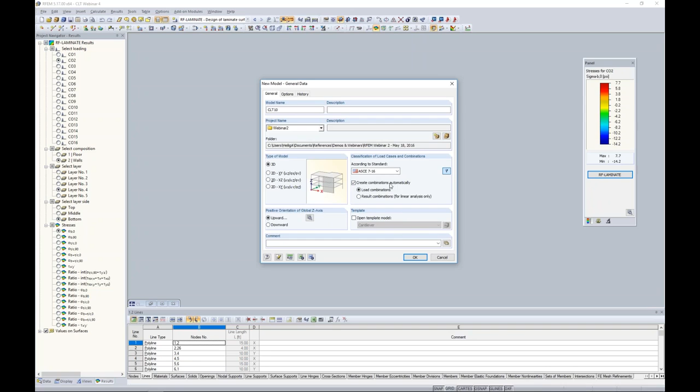With that said, we can immediately jump into our example today. When you first launch RFEM, this is the dialog box you're essentially going to see. We need to give it a name, so we can just call this one CLT10. The load combinations can be generated according to a standard, so you'll notice we have the ASCE 7 2016 here, the NBC 2015, as well as many other international codes. You can always uncheck this option, and that will allow you to manually create your load combinations instead. Once we've defined that, we'll go ahead and use the ASCE 7 2016 for our example today.

The program launches our file. We can see in the center portion here is our main graphical window. This is where we'll begin to generate the structure. Down at the bottom we do have our tables. If you prefer to work with the program this way, you can import and export information to and from Microsoft Excel. We have our tools up here at the top, and we'll certainly be utilizing those today. Over on the left, we have our project navigator. As we begin to generate this model, all of our input data is going to be available within this project navigator. If we scroll down, here is a long list of all of our add-on modules, here's RF-LAMINATE in particular for today. Once we do run an analysis, our results will be available within this project navigator.

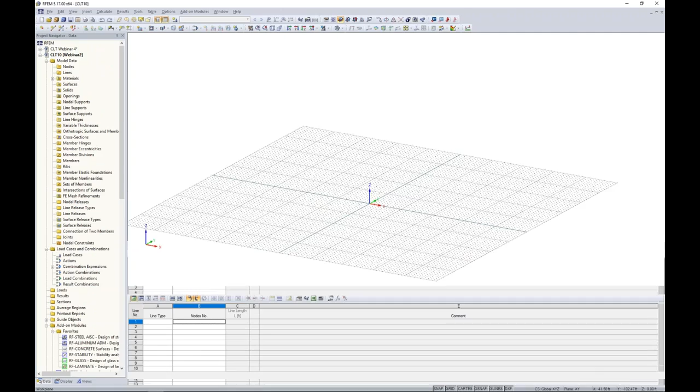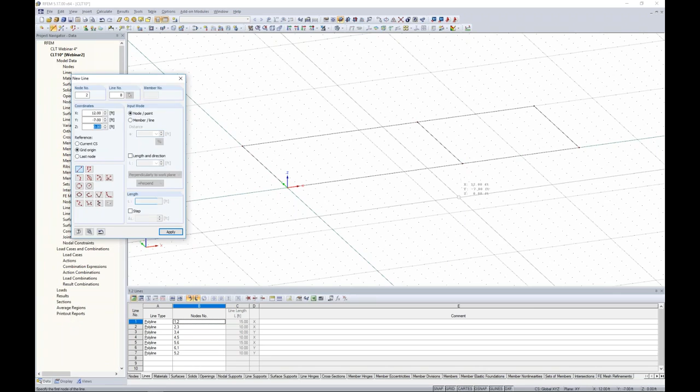To begin with, I want to start off again with just the basic geometry of our structure within the main program here, RFEM. So I'm going to draw a new line element, and it's exactly as you think, it's just a line element, something you'd see similar in AutoCAD. It doesn't have a cross section assigned. So what I'm going to do is give the structure its basic outline here, and we're going to snap to a few different points. Finally, closing this gap, we can right-click, and we can also repeat the new line by right-clicking, and maybe I want to add an intermediate wall here. Once I'm done with that, you can see, again, nothing more than those one-dimensional line elements.

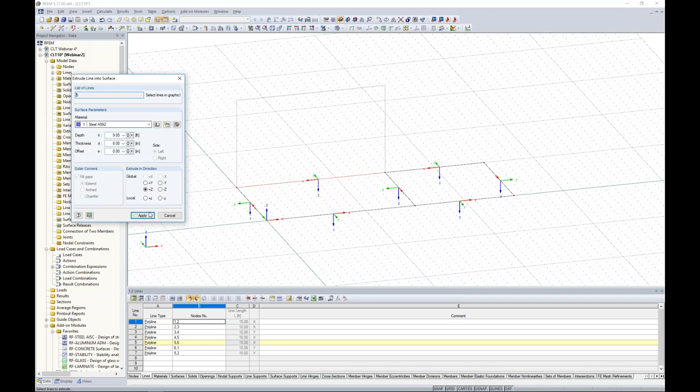Now, what I want to do to create the walls of this structure is to right-click on one of these lines, and we have the option to extrude the line into a surface. So this would be the 2D surface that makes up my wall element. Now, I can set the height as 9 feet. The thickness and the material don't matter right now - Steel A992 with a thickness of 8 inches is completely fine. The reason why, this is just essentially a placeholder. We're going to define our CLT compositions later on in the add-on module RF-LAMINATE. So as a placeholder, we can just leave these as they are. Now you'll notice that 1D line element was now created into a 2D surface element. The same thing can be done for the rest of these line elements to quickly create our walls.

Now, by all means, you can draw the surfaces individually as well, which is what we'll go ahead and do for our ceiling elements here for our first level. So for this, I can just easily change my drawing grid up to the top of the structure, and I'm going to generate surfaces here. So this time I will draw in those surfaces.

The material, again, doesn't matter. Steel A992, thickness doesn't matter. It's all going to be overwritten later. So I click OK. Now this allows me just to snap to a couple of points here.

Now I wanted to place two panels side by side just to show you that panels don't necessarily need to span between certain walls, but they can be set up like this for situations where you are not able to span a single panel between walls.

Now, as for our second room over here, I will just create a single surface element and we snap from one point to the other. So that is essentially defining all of the wall and surface floor elements for our first level.

I'd like to go ahead and put in some openings here. So eventually we're going to create a second level, so I'm going to need some type of opening to get from the first level up to the second level with my stairs. So just like we drew in a surface, we can also draw an opening.

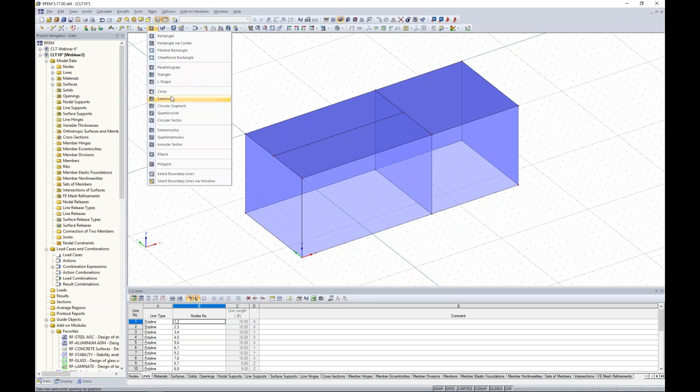In our toolbar up here at the top, you'll notice that we have many different options for shapes of openings. It doesn't necessarily have to be a rectangle, but circles, semicircles, ellipses, or even a polygon to draw the shape yourself is available. So for this one, we will just use a typical rectangular shape, and we can go ahead and just snap to a couple of points here to add in that opening for our stairs.

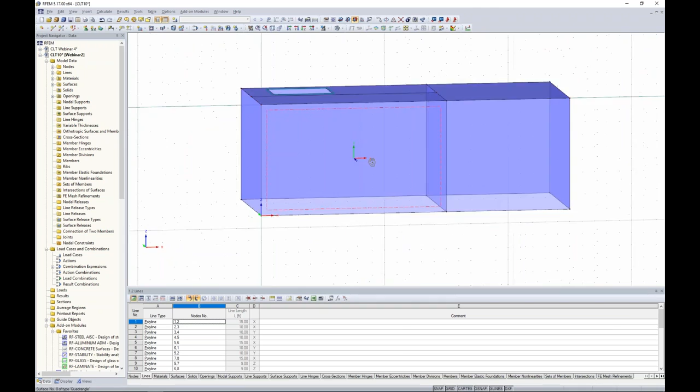Now, as far as the front of the structure, we want to change around our drawing grid here and snap to the front. And we'll go ahead and add in an opening for our window to begin with, as well as maybe an opening for a door.

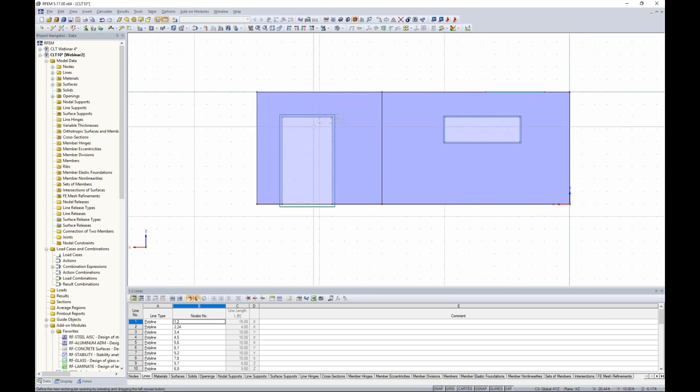So once those two openings are created, we'd like to do something similar to the back of the structure. Once again, just changing that drawing grid to the back, we rotate around the structure and just arbitrarily add in a rectangular opening for the window.

Lastly, we need a way to get in between the two rooms, so we'd like to add a door opening. So we'll go ahead and change around the drawing grid once more, snapping to that center point, and then we can add in our opening.

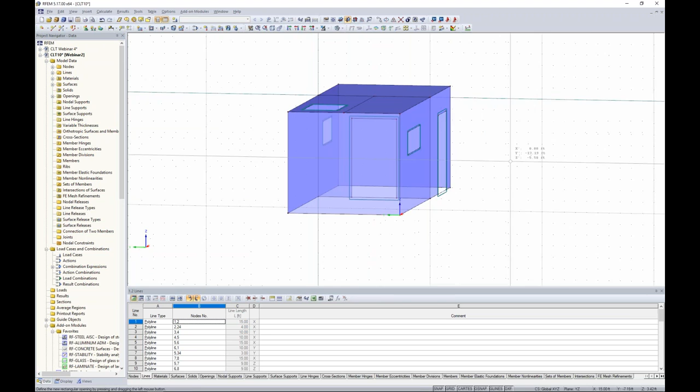So you'll notice the benefit of this drawing grid, that it really doesn't matter where I'm snapping to within the model to draw all these openings, but the drawing grid limits me to where those openings are actually placed on the structure. So all of the surfaces are pretty much done.

And I'd like to generate a second level with basically the same identical layout. So what we can do is just highlight everything, and we could use our Move Copy tool, but what's nice is we also have our drag and drop feature within the program.

So with this, I highlight everything, I hold down my Control key, and then I can snap from one node up to the top to create a copy with that drag and drop. So now you can see everything was copied up to the second level.

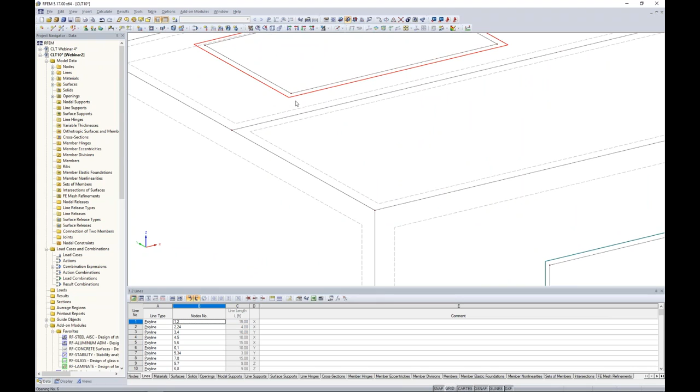Now I do want to delete a couple of these openings. This is probably easiest by turning this into wireframe view. I can zoom in here, select my top opening, just hit the delete key.

Now the nodes and lines still remain that made up that opening, and realistically you could leave these in here. They're not going to affect your analysis, but if you just like to keep the model a little bit more clean, we can just go ahead and select those with our selection tool and hit delete on our keyboard.

Same thing goes for our opening of our door. We probably don't need this one in here. So again, just highlighting and hitting delete on our keyboard.

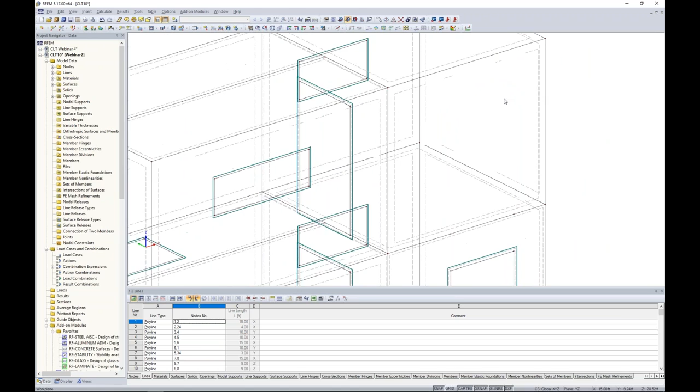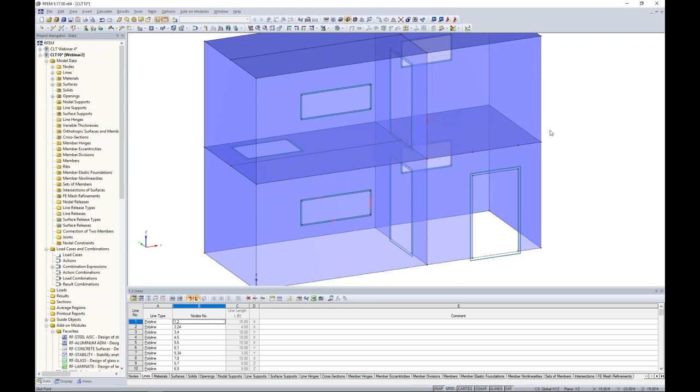So we're now done with all of these surfaces for our simple building today. Let's say we'd like to model a beam element that will hold up the two panels here, spanning a fairly long 15 feet. For example purposes, let me hide this second level by changing visibility to hide the selected objects. So where I want to place that beam is below these two panels that are spanning a little bit longer. So how can we do this?

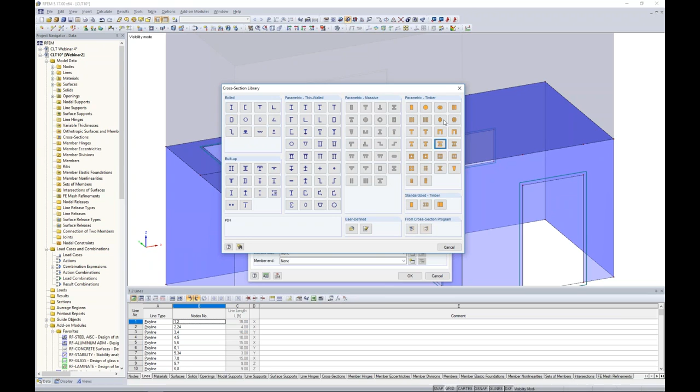We can start off by drawing a new single member. The member type is set to beam, and we can launch our cross-section database. Here are all the different cross-sections available in the program. You'll see sections from the standards, AISC, CSA, but today we'll work with parametric timber sections. We can choose the rectangle, set the width as 6 inches and the depth as 10 inches. The material is also set within this same dialog box.

Today I want to use a glue-lam member. I can import the material from my library, and on the left we have some filters. We'd like to filter according to timber, and we can choose North America. Here you'll see both the AWC and the CSA. Then we have our long list of all the materials directly from the NDS standard, which you can further filter according to the tables directly from the back of the NDS.

For example, glue laminated softwood timber, stressed primarily in bending - we choose that from table 5A. Now our list is a little smaller. You can always create favorites groups, a way to add a handful of materials to a favorites group so you can quickly access them rather than sifting through materials every time. I added my material today to my favorites group for the webinar. Here are all my material properties for that selection, and I choose OK.

Now we click OK through our dialog boxes, and it's as easy as choosing a point to snap on our structure. The program has nice AutoCAD-like features, so the point perpendicular to my opposite node automatically highlights - these are called O-snap settings, similar to what you'd see in AutoCAD. So our beam element was created here.

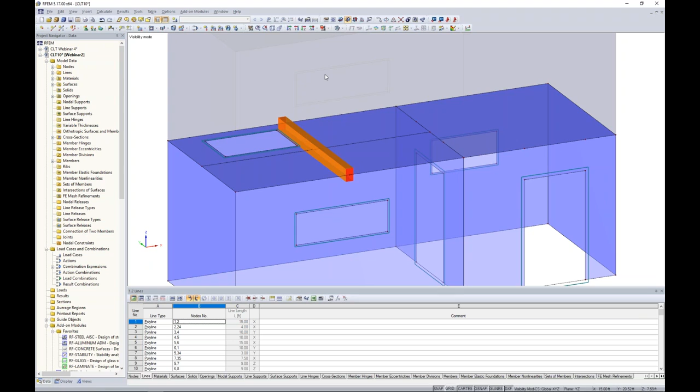Now a couple of considerations. We probably don't want to transfer moment from this beam to our plates and vice versa. That would cause too much torsion within this beam, and realistically the connection will most likely be screws from the panel down into this beam. So how can we release that moment? What we can do is utilize something called a line release.

Turning this into wireframe view, let me break apart this member here so it's still spanning as a continuous member, but broken into 2 segments where each panel occurs. To add a new line release, we can do that within our project navigator, where you'll see line release types, or we can choose it under insert model data, and then line release types down here.

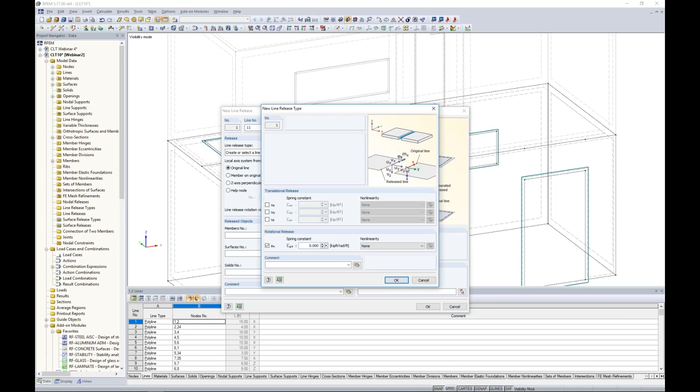Utilizing the project navigator, we right click and choose new line release. The program asks us to select the line, so I choose my first initial line here. Then we choose the line release type - I create a new type, and you'll see we have translation, but this is where we want to release that rotation. These axes, X, Y, and Z, are based on the local axes of the line - not the local axes of the beam element, and not the local axes of the panel, but rather the line that they share itself.

So we can select the option to completely release that rotation. The program also asks us what is the released object, so we select this surface on the far end and click OK. Now you'll see this line release symbol shown within the model. If I right click, I can repeat that same line release, this time choosing the other line. My line release type was already defined, so we choose our surface closer to us, click OK, and now I'll see that line release to release the rotation between the 2 surfaces and that beam.

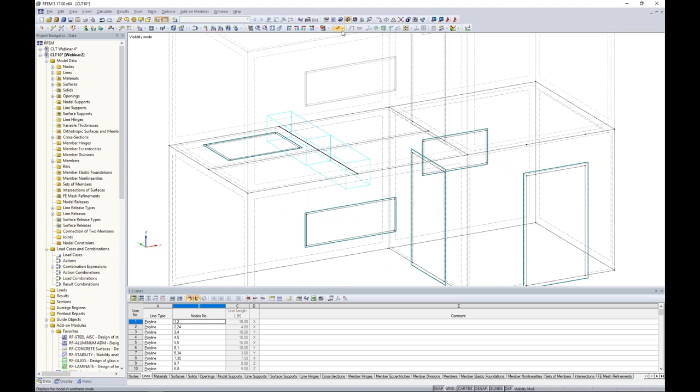The other thing to take a look at is we most likely want to drop this beam element below our surfaces.

We want to account for that eccentricity because it is holding up the beam element or the panels itself. So for this, we can easily select both members for the beam. I double click it, and here is the Options tab, which has member eccentricity, and I create a new definition type.

What I could do is manually define what is half the thickness of my panel, what is half the depth of my beam, and manually put in that eccentricity. But rather, the program's smart enough to do all of that automatically for us.

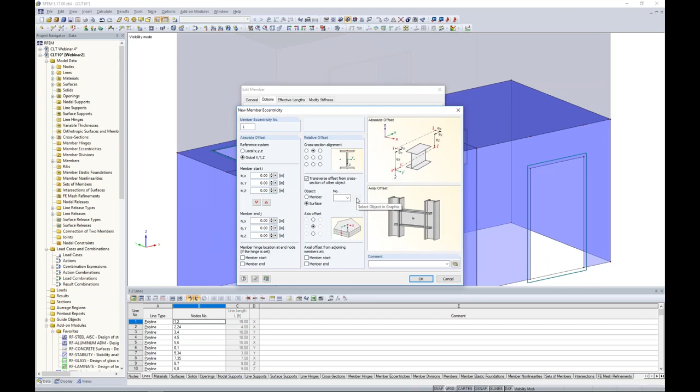So what we can choose here is the top of the beam member point, and we can offset it from the bottom of the surface. I just graphically select one of these surfaces, choose the bottom, and click OK. So now we can see visually that the beam dropped below that panel.

What's nice here is that eventually we're going to change these steel panels to CLT, and our thickness is inevitably going to change too. So instead of having to come back and adjust the eccentricity, the program will automatically update everything for us.

The basic geometry is now complete. The last thing we need to do before loading the structure is to support it. At the bottom of my walls, I'd like to add in line supports. Once again, with our tools at the top, I can choose new line support.

We have two default options, hinged or rigid, but we can always create a new line support ourselves. Here you'll see the 6 degrees of freedom, 3 in translation, 3 in rotation. We have the option for partial fixity.

So if you have something that's not fully fixed, not totally released, but somewhere in between, then you'd probably want to add in a spring constant. And lastly, nonlinearities, which can be extremely useful for wood panels and CLT panels here.

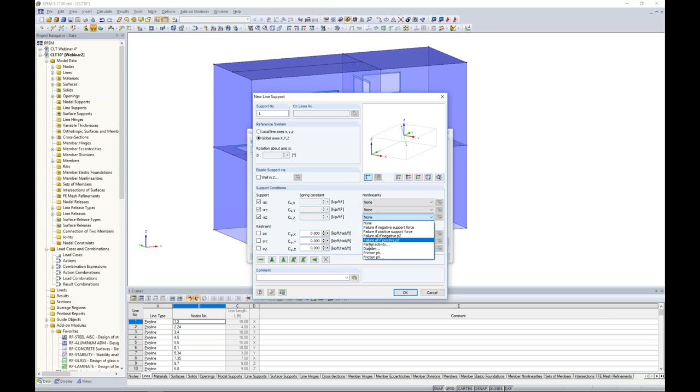The reason why is that maybe in compression, we would like the wall to bear down on the foundation. But with any uplift, we'd like to release those force transfers, and instead model in there some hold downs. That's where those nonlinearities would come into play.

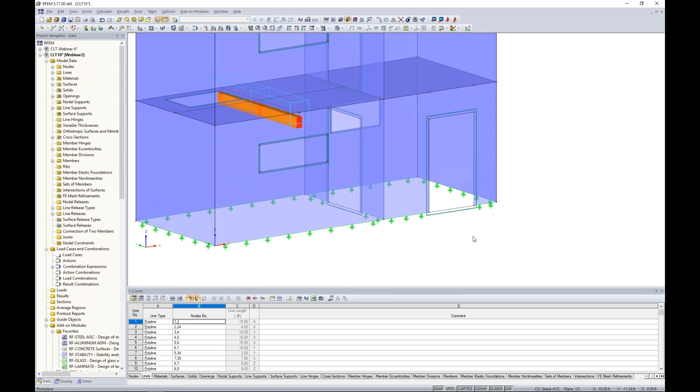Today, we'll just be utilizing a simple hinged line support, and we can select all of our lines at the bottom of the structure. One thing we want to do is select the two line supports where our door openings are and delete those, because otherwise the program will give us an error saying that we're trying to support something that doesn't exist, so we'll just preemptively take care of that.

So geometry and supporting of the structure is done, and we can move into the basic loads. For this, I'm going to go into a new load case, and here pops up my Edit Load Cases and Combinations dialog box.

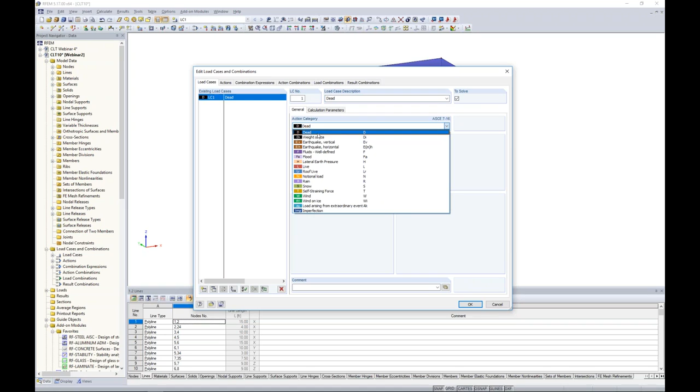The first load case we're going to define is dead load. The action category is set to dead load. This is important because this is how the program knows which load factors to assign according to the ASCE 7 2016 that we selected at the beginning of the model. The self-weight is automatically activated for dead load.

We create a second load case, called live, with the action category set to live. Self-weight is unchecked here; we don't want to account for it twice. Third load case, we'll call this one wind X with the action category set to wind. And finally, our last load case will be wind Y, again set to wind.

So the combination expressions tab just shows me that I'm going to create both LRFD and ASD load combinations, directly from the ASCE 7. The load combinations tab actually lists out the individual combinations.

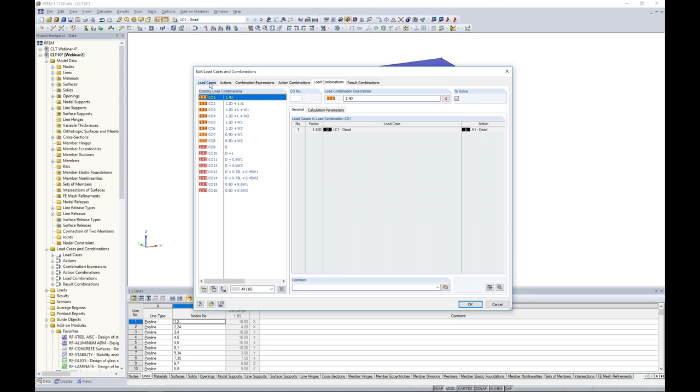So here are my LRFD load combinations in orange and ASD in red. These only include the load cases I've defined on that first tab: dead load, live load, wind load. I won't see additional load cases such as snow load when I haven't defined them on that first tab.

The result combination is an envelope solution, so we have our LRFD envelope solution here for our first result combination, and ASD result combination here. This will just show us the max and min out of all of these load combinations combined. So we've completely set up our load cases and combinations, but we need to actually place the loads on the structure.

So we'll start off with dead load, and here we'll just apply a basic surface load, once again accessing this tool at the top of our model. The surface load direction will be set in the global Z direction. We can see those global axes here with the magnitude set at negative 0.1 kips per square foot. I can just click on those surfaces, or highlight the first level here to apply that same load. You'll notice that the openings are automatically considered, and our dead load is complete.

Same thing for live load, same concept. We'll go back to our surface loads here and simply change the magnitude to negative 0.05 kips per square foot, and we'll only apply this to the first level here.

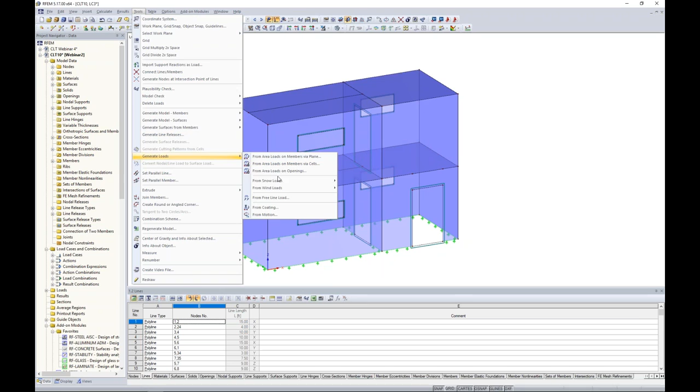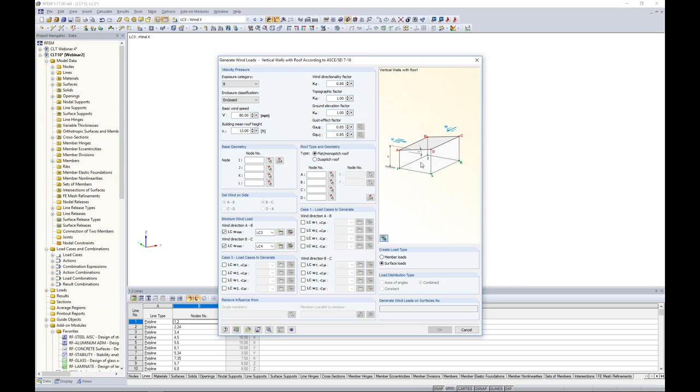Moving on to wind load, under Tools, Generate Loads, for both snow loads and wind loads, we do have the option to generate these according to ASCE 7 2016. The wind loads only take into consideration case 1 and case 3 from the standard, and realistically this is for basic rectangular structures only. Anything outside of that, you're going to have to manually apply the loads. This will apply them as either surface loads or member loads to the external elements of the structure.

So it won't be placed on a diaphragm as a nodal load, but rather the actual loads themselves. Just keeping with a simple example today, we're going to apply basic surface loads for our wind in the X and Y. Going back to our surface load, all we're doing here is changing the load direction, and the magnitude can be set at 30 pounds per square foot. Now you can vary the load linearly in the vertical direction, for example if we want higher wind load at the top, lower wind load at the bottom. And these loads don't necessarily have to be applied to the entire surface either. We have free loads, which allow you to apply surface loads to only portions of your surfaces. So the possibilities are really endless when it comes to loading here.

So we just apply a basic wind load in the X direction. Now I'd like to maybe have a small suction load on the other side. We'll just simply change the magnitude to something more like 10 pounds per square foot and apply that on the other side of our structure. So pretty basic application today.

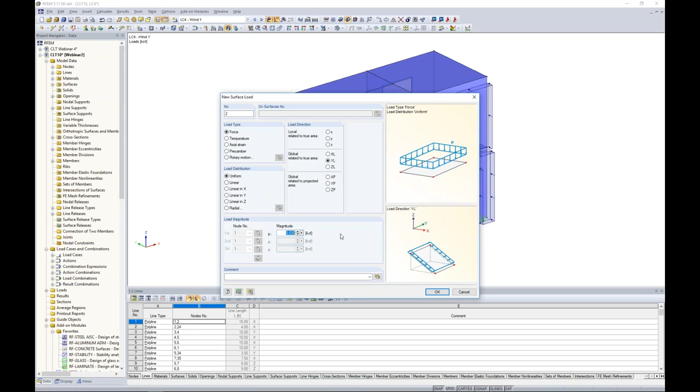Moving on to wind in the Y direction, same concept, just changing the load direction to Y and the magnitude to 30 pounds per square foot. We click on these front surfaces here. Again, you'll notice that the windows and door openings are automatically accounted for. And one more time, a small suction load in the back, 10 pounds per square foot, and we can always highlight all of these surfaces at once to apply it to the back side of our surface. So that's the basic loading.

Now we can cycle through these load combinations here to see them all applied at once. What's also nice is that these load factors are automatically considered in the graphical interface here when we're displaying the loads on the structure.

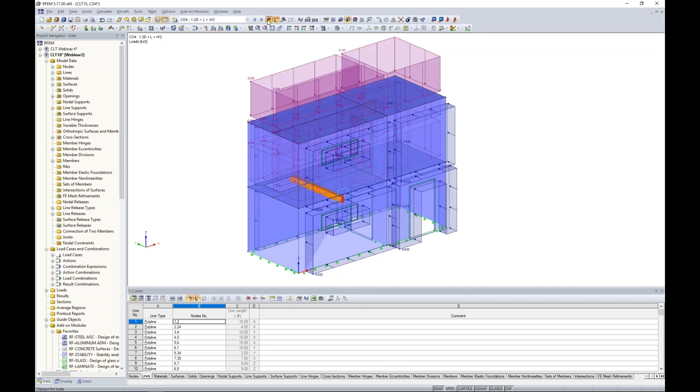Okay, so you would think that, all right, we must be already ready to run our analysis, but remember, we still have steel surfaces here. We haven't even touched the definition of our CLT panels. So this is where we want to launch the add-on module, RF-LAMINATE. Again, I can access this add-on module within my project navigator here, and we double click it, and up pops a dialog box. So the add-on modules are nothing more than a dialog box within RFEM. Everything that I've already modeled and loaded so far will be considered. I don't need to redefine any of that information. The only thing that I'm defining here is information specific to the NDS standard and to cross-laminated timber.

So I want to fill out a few things here before I explain what's going on with the RF-LAMINATE add-on module concept. So the first thing we'll choose here is design. You'll see the NDS 2015, and as of our last release, we added the NDS 2018. We have both ASD and LRFD. Maybe today we utilize LRFD.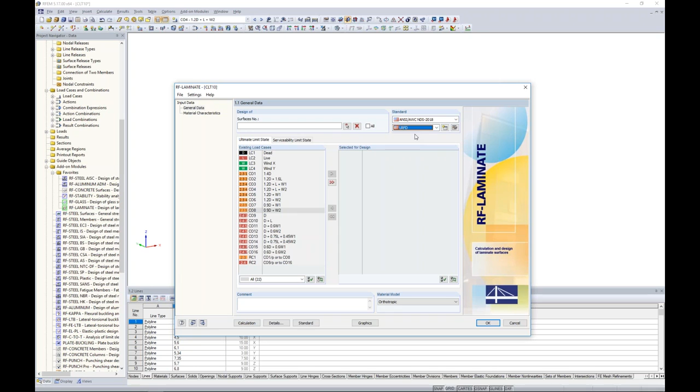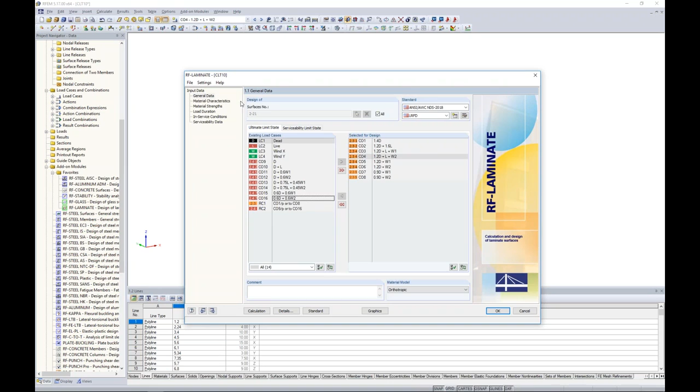Our surfaces, we can choose all the surfaces here. So you could select some graphically if you only wanted to design a few, but for today we're going to design all of them. Our ultimate limit state combinations, we will choose all of our LRFD load combinations, and for serviceability we will choose ASD because again we can check deflections. So the material characteristics, this is where we define the CLT compositions, those individual layers that make up that CLT panel.

I want to go back to the PowerPoint to explain what's going on behind the scenes. With RF-LAMINATE, as I mentioned, we're going to define each individual layer of that panel. Now, each layer has its own stiffness matrix. So once we've filled in all of the layers, the program will automatically generate an overall stiffness matrix.

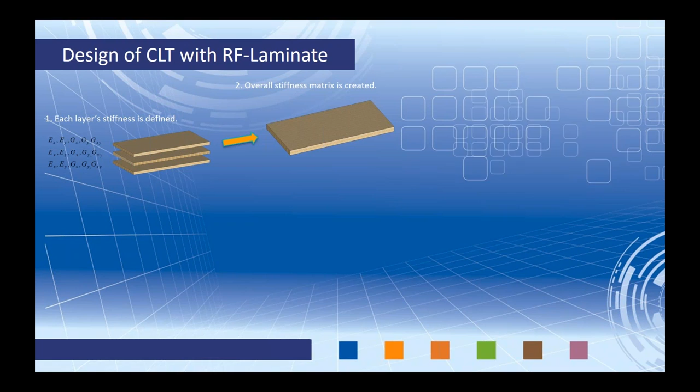It's going to run through all of those load cases, load combinations, and eventually we're going to get internal forces. These internal forces for our CLT panels are brought back into RF-LAMINATE, where the stresses are distributed to each individual layer. A cross-section profile of a CLT panel for bending stress might look similar to this.

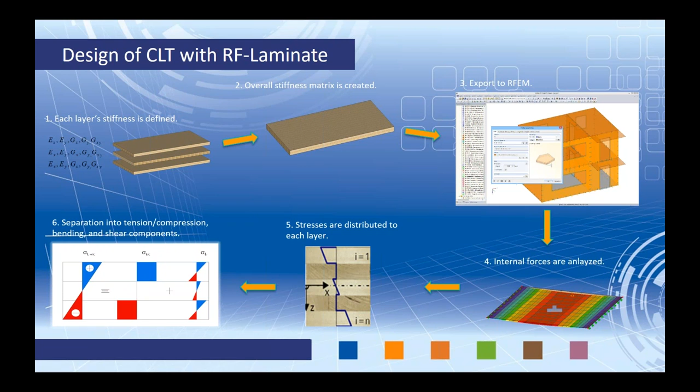Finally, we separate those stresses into tension, compression, bending, and shear components. We compare them to the strengths of our CLT based on the NDS standard, and we give you a design ratio. So that's essentially what's happening underneath the hood.

Now, as far as the 2018 NDS updates, what exactly changed? In reality, there were only 2 revisions in Chapter 10 for CLT. The first being the format conversion factor K sub F, applicable for the rolling shear design value F sub S within LRFD design.

Within the 2015 standard, this was 2.88, and it was simply adjusted to 2.0. You can see this within Table 10.3.1 of the 2018 standard, and within RF-LAMINATE, when you have the 2018 standard selected, it will automatically take into account that small change.

As far as the second change, it's a little bit more complex. Deflection calculations are run according to section 10.4.1. The NDS code tells us that the apparent bending stiffness must be adjusted to account for shear deformation, and this is what you're seeing here with this equation.

So in order to calculate deflections, we should use this stiffness. This is pretty much an approximate equation, done by reducing the bending stiffness EI with a shear deformation adjustment factor K sub S. So we can see all of that here.

So this equation was slightly modified, and it matches up a little bit more closely to the CLT handbook, but that's really the only second change.

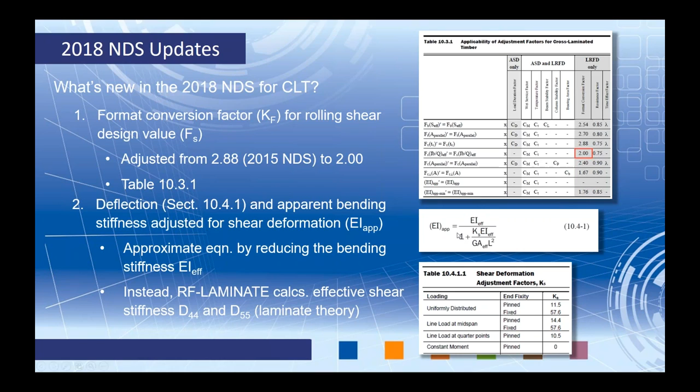Okay, so let's jump back to our example here, and let's begin by defining our first composition. So what we'll first define here are our floor panels. We give this current composition a name. We choose these surfaces, which we can choose graphically here. We'll choose our roof level and our first floor level, and I click OK.

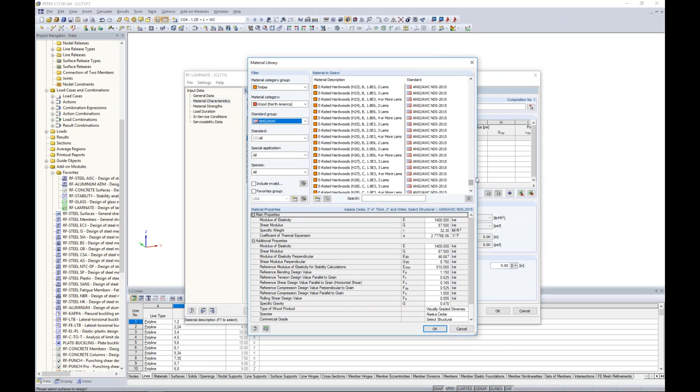Now, as far as the different layers, you can individually choose these layers by going into our material database, similar to what we saw in RFEM. The material category can be set to Wood North America. We have AWC and CSA here, and then we can choose one of these materials applicable for our first layer. So that's one way to do it. We can set the thickness, and all of these properties will be generated automatically from that particular material.

Another option is to bring in the imported layers from our library. Within this library, you'll see we have a handful of producers that we've reached out to. They gave us their product information created for CLT. For the Canadian and US market, you'll see the APA, Nordic Structures, Structurlam, and SmartLam. You can always import one of these products directly from the manufacturer if you're utilizing one of them.

Who we'll be utilizing today is the APA. For the US, grade E2 is fine, and we'll select the thickness as 6 7/8.

Now you can see that all of these layers were automatically populated within this dialog box. If you create your own individual layers, you can always save them and bring them up for a future model within RFEM. So a lot of options here. You don't necessarily need to individually define those every time.

The modulus of elasticity, shear modulus, specific weight, and everything is automatically populated here, based on the producer we're utilizing. The material strengths are also automatically populated, including strengths for bending, tension, compression, and shear.

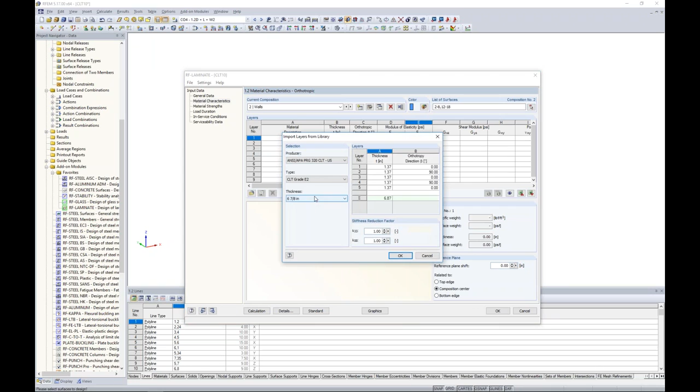We go back to the add-on module and populate from this same database, using the same grade E2, 6 and 7/8, which is fine for our case today. Then I click OK.

One thing I'd like to point out is this option here to edit the composition details. This is applicable for both the floors and the walls, and there are quite a few options here to turn on or off or adjust.

You'll notice we have consider coupling, cross-laminated timber without glue at the narrow sides, shear failure in the glued contact surfaces, as well as stiffness reduction factors.

To explain all of this, although it looks pretty simple, it's actually fairly complex what's going on in the background of RF laminate. I'm going to jump back to the PowerPoint to explain some of these settings, and they're incredibly important for us as engineers because we need to input the right information in order to get a correct analysis.

The first option, consider coupling, is automatically turned on by default. The reason why is we're making the assumption that these layers are glued to each other at both the top and bottom.

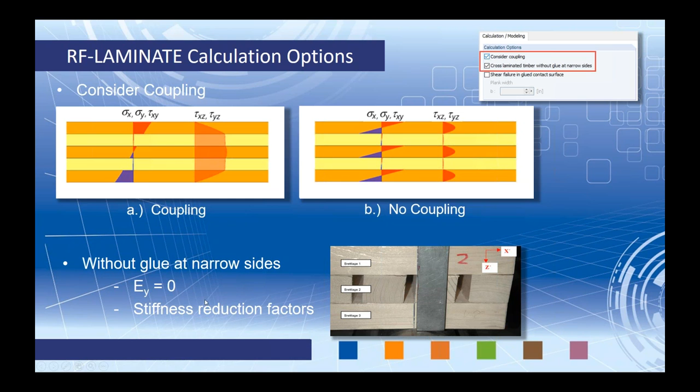When you have this option checked, we'll automatically set the modulus of elasticity in the local y direction of the panel to 0, assuming you have no stiffness in that direction. With that said, those stiffness reduction factors also need to be adjusted, which takes us to our next slide.

Without glue at the narrow sides, it's strongly recommended that your K33 and K88 stiffness reduction factors be modified—K33 for torsional stiffness, and K88 for in-plane stiffness. What's interesting is that the NDS and the CLT handbook don't give much information on how these should be reduced when we don't have glue at the narrow sides, so I pulled this information from the Austrian Annex, which is the Eurocode EC5.

I think we can all admit that Europe is a little bit more advanced when it comes to CLT design, simply because it's been around a lot longer than what we've seen within the US or within Canada. So I think it's perfectly fine to refer to the Eurocode when there's portions in the NDS or CSA that maybe aren't so complete. Within the Austrian Annex, we have some simple equations for K33 and K88, those stiffness reduction factors.

This is an Excel file I got from one of my colleagues. What it allows us to do is simply put in the total thickness of our panel, the number of layers, and the board width, and out pops these calculations for K33. This is the value we want to put back into RF Laminate when we are not considering glue at the narrow sides. Same thing goes for K88.

By default, these are set to 1.0 even when you have this option checked, and that's simply because there isn't any guidance given to us within the NDS standard. So again, it's strongly recommended to make sure you reduce those stiffnesses.

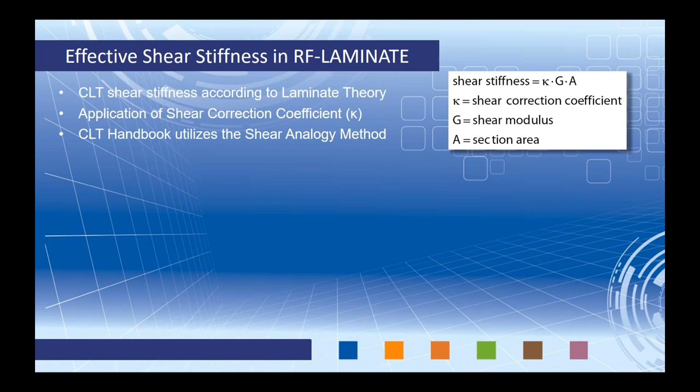Here we're going to apply the shear correction coefficient to our shear stiffness, G and A. When we're looking at a homogeneous rectangular section, it's pretty common to set this shear correction coefficient to 0.8. We can see the shear stress distribution as a parabolic type function. Well, with CLT, we don't have that parabolic type function because it's not a homogeneous section.

Therefore, through research, there are some recommendations on what to use for that shear correction coefficient, whether it's 3, 5, 7, or 9 layers—we have some ranges here to set that to. But the question is, if I have 5 layers, like my example today, what exactly do I set this factor to within this range? Either the low end, the high end. What happens if I have 11 layers? What do I use then?

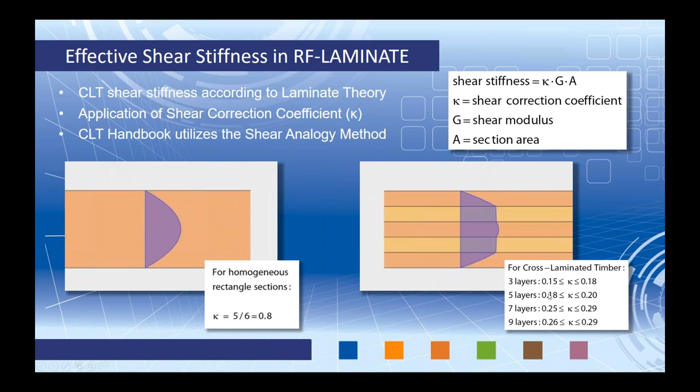So we will actually take you to the next slide to show you how these shear stiffness calculations for the XZ and YZ directions are calculated according to general technical regulations. Here are the equations for the shear correction coefficient, and we can see how that shear correction coefficient comes into play when calculating the D44 and D55 stiffness matrix entries within the CLT panel.

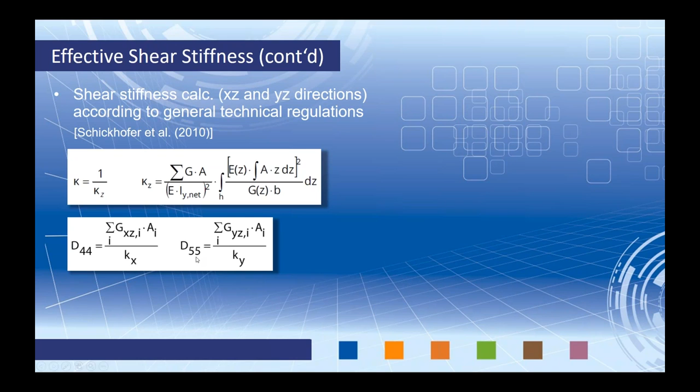Now, within RF Laminate, here are the complex equations that go into calculating D44 and D55. This is how the module is calculating those stiffnesses. This is all within our help manual within RF Laminate, so you do have access to all these equations and the theory behind the module.

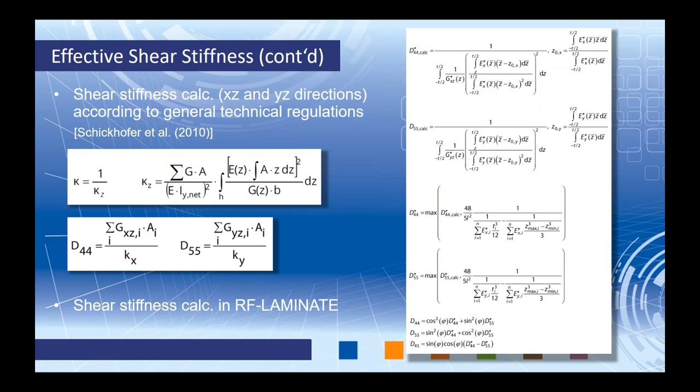But point being, I will show you in just a minute how you get the values of these D44 and D55, and you can back-calculate to eventually come up with what the shear correction coefficient actually is for that particular panel. All of that is done automatically, and this is why I say you rarely will need to adjust the shear adjustment factors for K44 and K55 because it's already being done underneath the hood.

Finally, the last option we have here is shear failure in glued contact surface. This is for a new torsion check, just added into the program within our last release. This is mainly for wall elements which are loaded in plane. I think we can imagine with gravity loads and wall elements how torsion could potentially be a concern.

So it's considered without glue at the narrow sides again. One suggestion here is to make sure that we set our FE mesh within our model to approximately the same size as our board or plank widths. We'll be doing that a little bit later on in our example, but again, it's important because your results could be a little bit skewed if you choose an FE mesh too small or too big.

What we can do is activate the shear failure, and you'll also want to turn on your results for now the torsion checks. These interaction equation results will now be displayed in RF-Laminate, but we have to manually turn those on. They're still going to be calculated, it's just that you can see how many options here you have to view your results in the laminate module. We don't want to overwhelm you, so we'll be sure to do that as well.

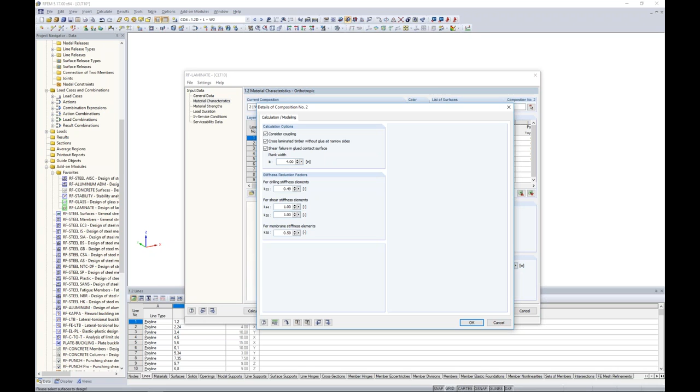Okay, so we're finally ready to jump back to our example, and here we are back to that original dialog box. I'd like to set the plank widths to 4 inches, and for my walls I want to reduce that stiffness to 0.49 for my torsion, and for my in-plane stiffness 0.59, based on the PowerPoint I just went over. I click OK.

So for my walls, I've only made those changes to the walls. My floors, which we can pull up here, remain unchanged - I'm not applying those stiffness reductions. But for each individual layer, I can view its stiffness matrix here.

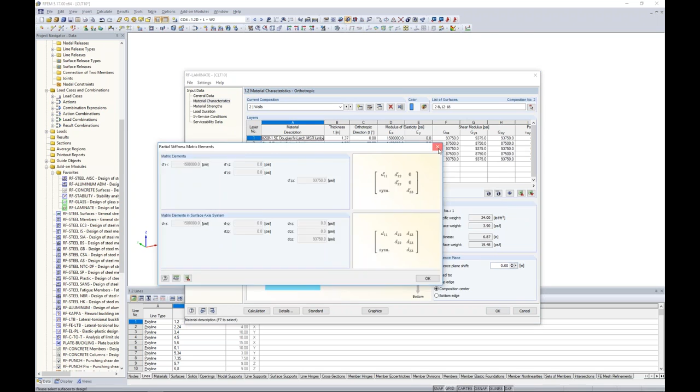As I mentioned, let's take a look at the material strengths here. Because we're now taking into account torsion, we'll see a torsion strength added to our material strengths table. Now this is something maybe you want to get from the manufacturer - this is just some arbitrary value. It's not something that came from the manufacturers that we populated from these layers because we don't have that information, but rather it's something you need to manually fill in. Everything else should be good to go.

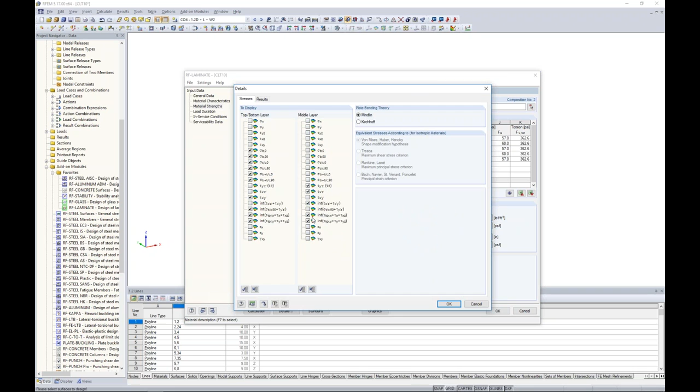Finally, under the details button, this is where I said you may want to activate the results for torsion. If we're checking for it, we want to see what that design ratio is, so turn those on and those will be seen in the results.

So finally, moving on down our list, we have our load duration. This is for load duration factors directly from the NDS standard. We have in-service conditions - is our panel dry, is it wet, what's the temperature? And finally serviceability, so we can check deflections for these CLT panels as well.

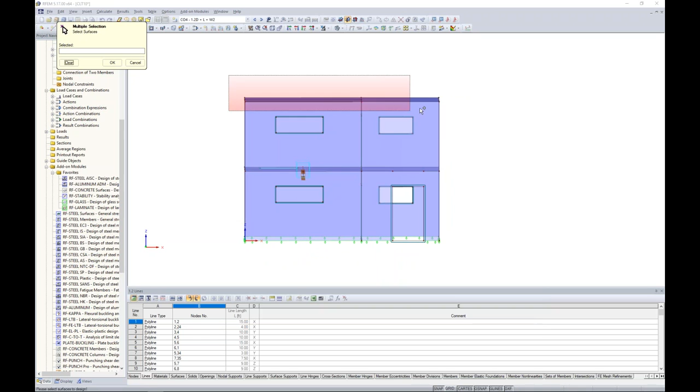What I can do here is, I'm probably most interested in my roof panels and my first floor panels for my deflection checks. I click OK.

The reference length - well, what is this referring to? Under the standard button, we see here serviceability limits, and this is our limiting deflection ratio. L over 360 is used for simply supported, and we have L over 180 for cantilevers.

By all means, you can adjust these - these are just default values. So this is the L that we're referring to here. Now either you can use the minimum boundary line of the surface, the maximum, or some user-defined length. Today we can just use the maximum, for example, of 15 feet.

So we're almost ready to run the calculation, but there's a couple more things we need to take care of. Jumping back to the material characteristics, this is my wall composition, and we have 5 layers.

Now the orthotropic direction here is in reference to the local x-axis of my panels. So I have layers 1, 3, and 5, which are oriented 0 degrees from my local x-axis. This is most certainly the strong axis of my panel.

I probably want to make sure that the panels are oriented with the local x-axis in the vertical direction to take those gravity loads. Otherwise we're not getting as full use as we could be out of those panels if we orient it so that our strong axis is in the horizontal direction.

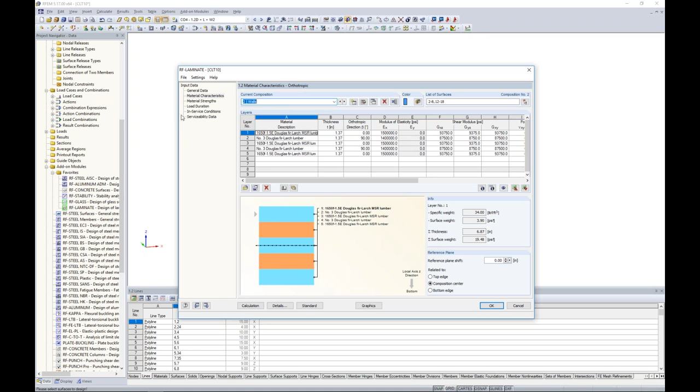So how do we check this? Well, we can go back into RFEM, and the first thing to notice is that our panels are no longer purple for steel. If we double click on them, they're now considered with the stiffness laminate, and we can see the material is now set to RF laminate.

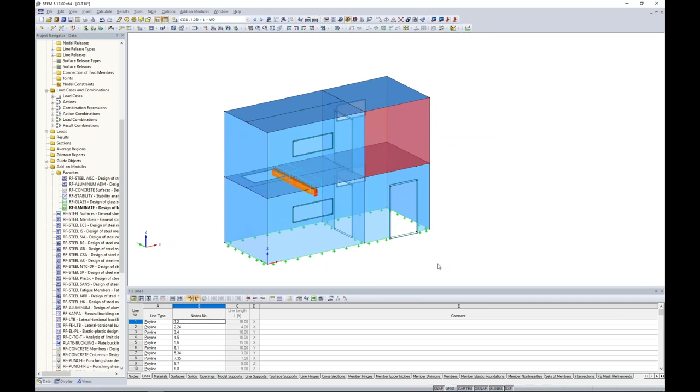I can right click on any of these surfaces to display the local axes, and zoom in here. The local x-axis is exactly what we don't want it to be. The strong orientation is facing horizontal right now, and we want to rotate that 90 degrees so that the strong orientation of the panel can take those gravity loads.

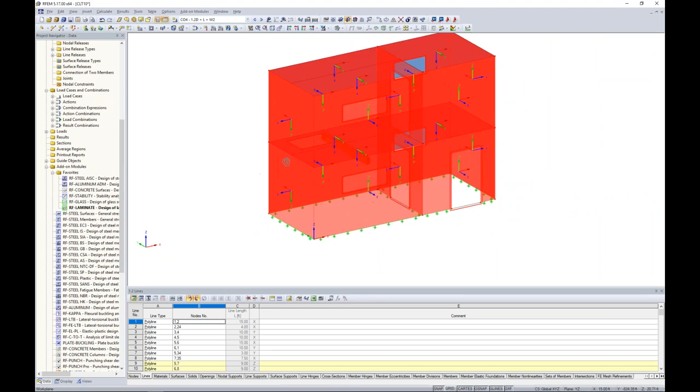So how do I quickly rotate all these panels? I can select all of my wall surfaces and double click on them. We have a tab called Axes, which allows me to change all of my local x-axes parallel to a line I choose in the model. So I choose this one in the center because it runs from the bottom to the top, click OK, click OK again, and now all of my panels are facing in the vertical direction with the local x-axes. So the strong orientation is now taking on those gravity loads.

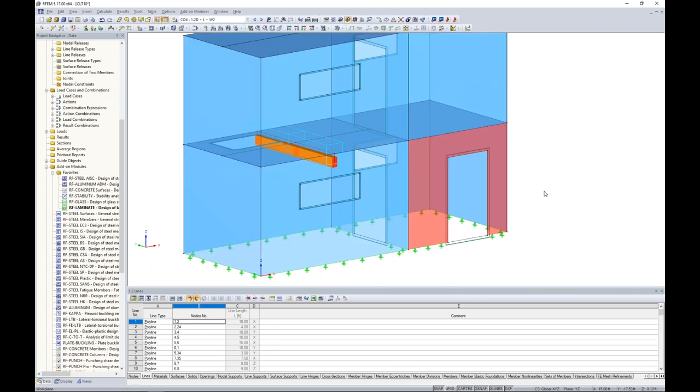So it's incredibly important in terms of which orientation our panels are facing.

The other thing many of you are probably thinking of right now is that we currently have fully fixed connections between all of these CLT panels. Well, we all know with CLT that this is definitely not the case. Rather, we're going to screw these panels together, and with screws we want to release the moment. We also maybe want to account for some slip of the screws, maybe at this location in the vertical direction, we have some movement. So how do we account for the CLT connection from one panel to the next?

Well, we'll do this with something called a line hinge. A line hinge can be accessed in our project navigator, or under model data, insert line hinges assigned to lines graphically. Line hinges are similar to our line releases, which we applied to our members, but they're also different. We're actually going to modify the FE mesh elements at this location of the line hinge.

So if we want to release the moment, we're going to set the stiffness of the FE mesh at that particular point to something very, very small so that we're not going to see the bending moment. Whereas a line release is exactly what it sounds like - it's completely releasing and not adjusting the stiffness of the FE mesh.

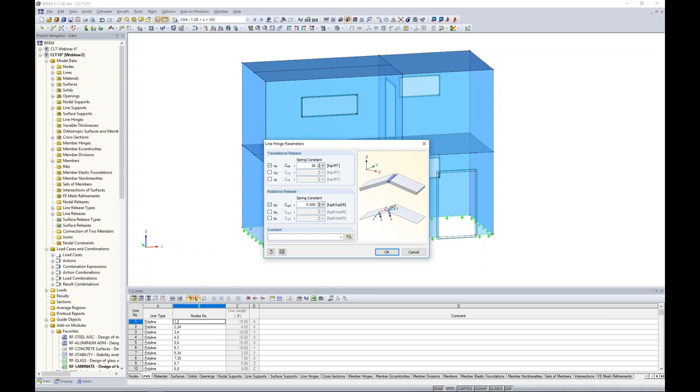As far as the line hinge definition, it looks similar to a line release. We want to fully release the moment here. Again, these are based on the local axes of our line element, not of the panels. We also want to account for some slip, so along the local x-axis of our line element we can put in a spring constant of 50 kips per square foot. Now we're going to get some movement along the line length, and I click OK.

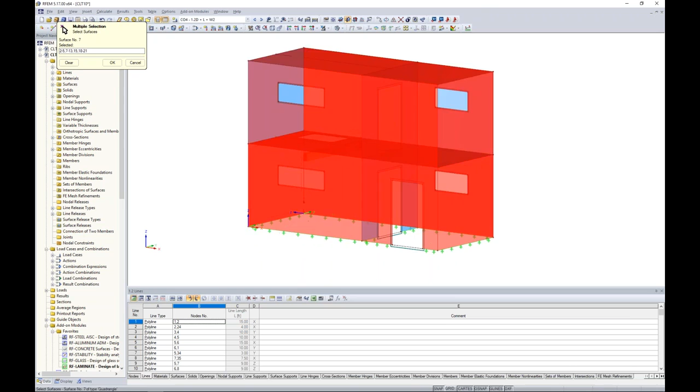I'm going to choose the option to select the surfaces and have the program automatically assign the lines, since I think this is quickest. So I'm just going to make a selection of some of my panels, and I'm being a little selective - it will make sense why in just a minute. So I click OK, and we apply those line hinges.

We can now see the line hinge symbol within the program. When I zoom in to the line hinge location of these two panels, what I see is hinges on either side. Now with any finite element software, whether it's RFEM or anything else, we know that if we have two beam members framing in at a joint, and those are the only two beam members that exist, and we set the end rotation of these beams to be released for moment, we're going to get an instability.

You never want to set both beams in that case to pin. You want to leave one at least fully fixed. Otherwise, we get instabilities and we can have issues within the program. Well, the same thing goes for panels - at these locations, we want to have at least one fully fixed panel.

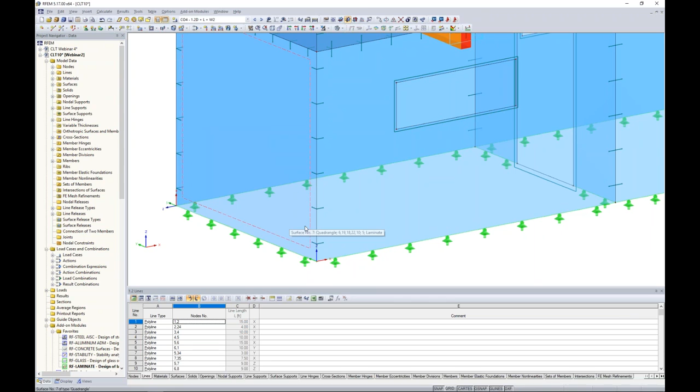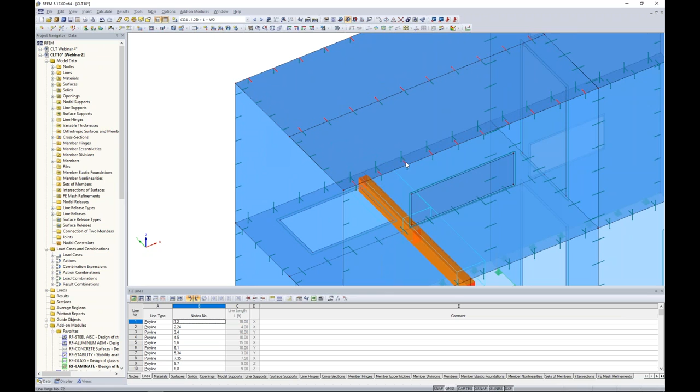So this is why I can hold down my control key to select some of these line hinges, hit delete on my keyboard, and as we see, we only have one line hinge defined at that joint. Same thing goes for the other side. We select some of these locations where we have too many line hinges defined, and up at the top, same thing, otherwise we want to avoid those instabilities. Holding down my control key, I'm just deleting some of them, and finally over here on the right hand side.

That takes care of the roof element, but we also want to select our second level here. We'll hide the visibility of that level, and make sure we address the line hinges at this ceiling level. We'll just go ahead and select them graphically, because otherwise we have too many line hinges defined. Hit delete, and one more time on the far end here.

Okay, so now we have completely finished the geometry of this structure. Loading, we've defined our CLT panels, so we're finally ready to run the analysis. Now actually, one more thing I forgot - remember within the PowerPoint I said that we should really set the FE mesh for torsion, when we're doing torsion checks, approximately equal to the plank width for each individual CLT layer.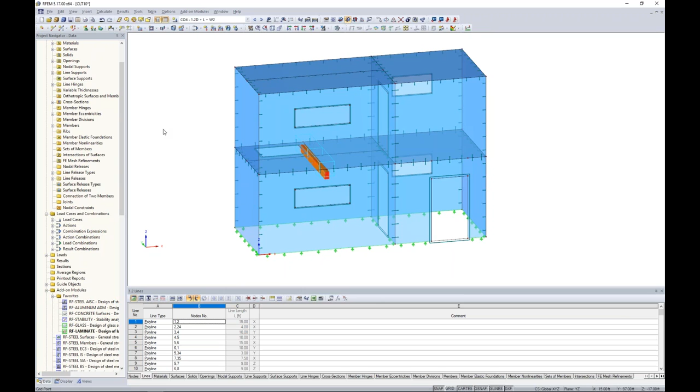So for my wall elements, I need to adjust my FE mesh. We do have FE mesh refinements in the program, so I can individually change each wall panel's FE mesh. FE mesh refinements are also available for line elements, nodes, anything of the sort. But instead, under Calculate FE Mesh Settings, we can just change the global FE mesh, which by default is set at 1, to something more like 4 inches, because that's the width of my planks.

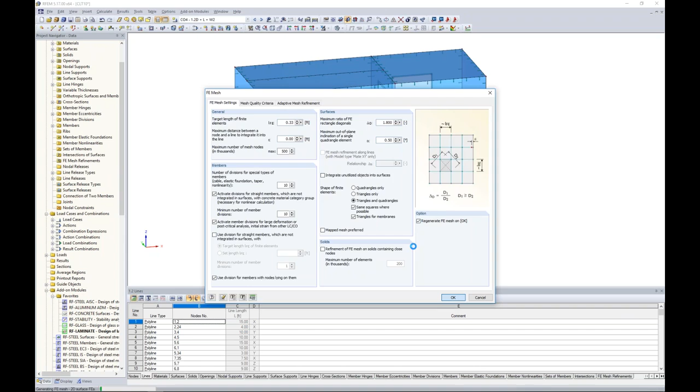We can regenerate the FE mesh just to see how it looks, and the program does everything automatically for us. So everything's tying into nodes, to openings, to panels, to line releases automatically. If we make any changes, the program will automatically do this every time we run a calculation. So quite powerful when it comes to finite element capabilities.

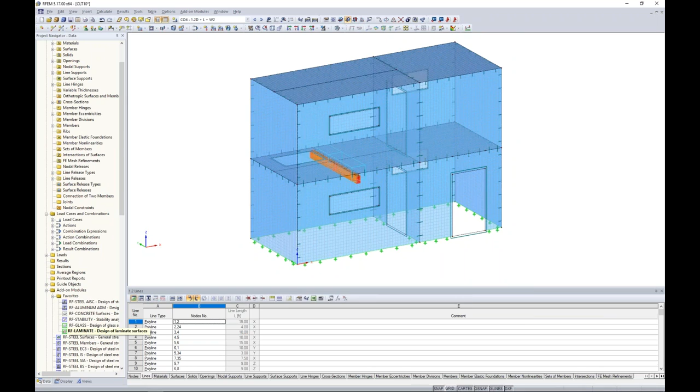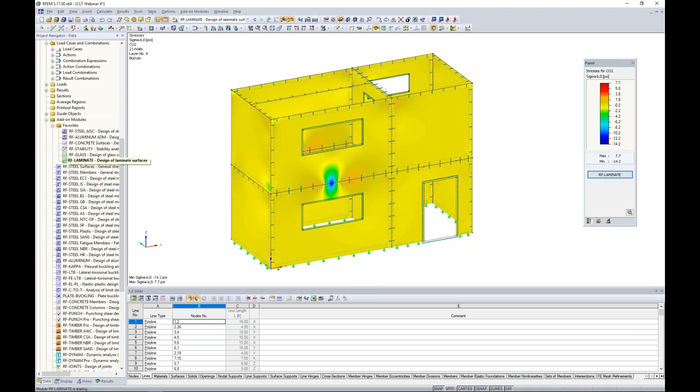So now we truly are ready to run the analysis, and we can go back into RF-LAMINATE if we'd like to run the calculation here. Now because I have slimmed down the FE mesh a little bit, this actually does take just a minute to run, so I wanted to jump to an already saved model here where we can launch RF-LAMINATE. This will take just a second to load all of the results, so it doesn't take too long, it just takes a minute.

You can see here it's having trouble pulling up all the results, but eventually here we are. We're presented with the results within RF-LAMINATE. So after you run the calculation, you're going to see your results tabs available here, results tables. We can view the max stress ratio by loading, we can view it by surface, and we can view it by composition.

So maybe if we take a look at the results by surface and I drag down my table down here, you'll notice that everything is synced up in the background. What the program's doing is it's actually highlighting the surface that I'm currently looking at in the table, and it also has this big red arrow. That red arrow is showing me exactly where the controlling internal forces for that stress check are located.

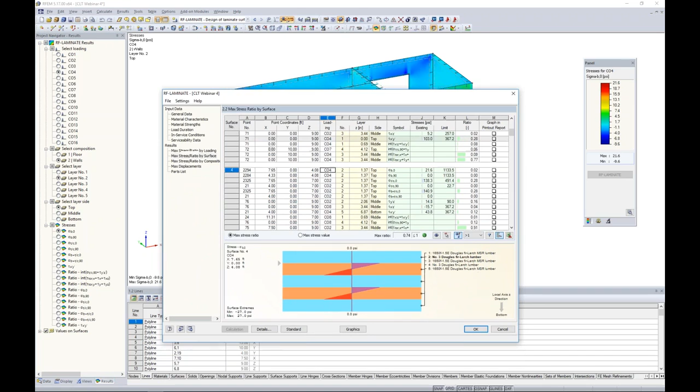In addition, we can view this table here for surface number 4. We can view bending stresses, we can view tension and compression, we can view the shear. Here is the stress distribution throughout the cross-section of our CLT panel. And finally, you'll notice here that we have torsion checks as well for all of our wall elements. So for any one of these, we can scroll through and see the details of the stresses.

Now we're ultimately getting a max ratio check here of 0.74. We have a nice green smiley face because he's telling me that okay, everything passes with all of these CLT panels according to the NDS standard, and we're below 1.0. We can always export any of this information directly to Microsoft Excel if we'd like to further sort it.

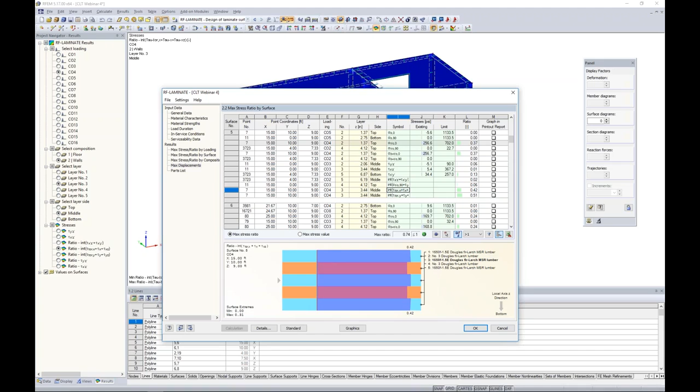Now, this is all included within the printout report as well. So taking a look at the rest of the tables, the max displacements, again, we're also doing a deflection check. We can remember this. So here are my deflections based on the analysis from the load combinations I've selected.

Here is my limiting deflection, which remember that's for my limiting deflection ratio, L/360 is what I set it over. So my limiting deflection is 0.5 inches. Again, we get a different deflection ratio check here, 0.7, again below 1.0, so we're seeing our green happy face.

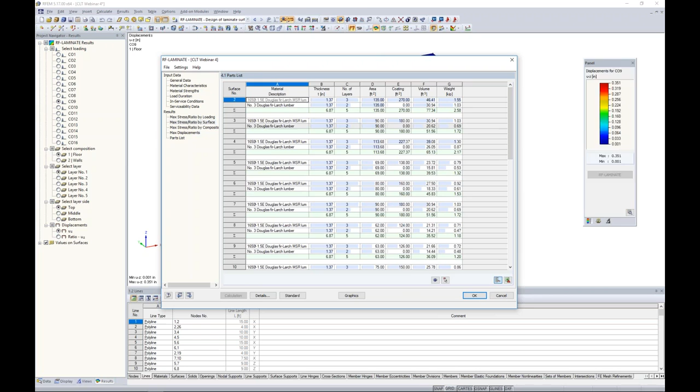And lastly, we see a parts list, which is nothing more than a material takeoff. Again, you can export this information to Excel. So these tables are very informational.

Again, under the details tab, this is where you can turn on and off some of the different stresses maybe that you're interested in. But it's also nice to see our information graphically as well. So for this, we can always jump to the graphics view here. And technically, I'm still within the RF-LAMINATE add-on module, but I'm viewing my results graphically within RFEM.

So what this allows me to do is you'll see here all of my load combinations that I've solved for, both LRFD and ASD load combinations. So we can easily jump to any one of these load combinations within our project navigator here. Now, the composition, we can either choose our floors to easily view this, or we can choose our walls here.

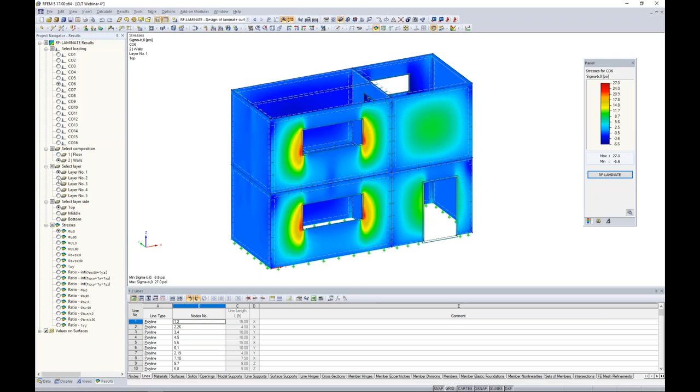And in addition to that, we can view the 5 different layers. So remember, we have 5 layers that compose these CLT panels, so we can view the stresses within each individual layer. And even more so, we can view the top, middle, and bottom of each layer. So very, very detailed when it comes to all of the information that we provide you within the results for RF-LAMINATE.

Then even more so, here are all my stresses available to me. We have bending stresses. We have some higher bending stresses where our openings are. This makes sense. We can view tension and compression, shear, and so on. And then all of our ratios will be available for these walls, fairly low ratios.

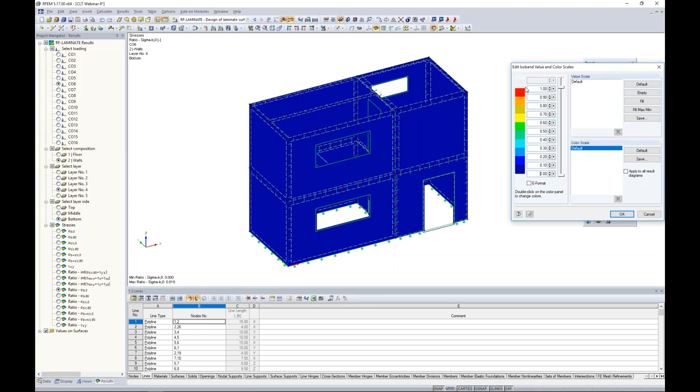Now, keep in mind for any of these checks here, we can always adjust our panel by double clicking on it, and maybe we're interested in any ratios that are 0.4 and lower. We can fill this in, we click OK, and then automatically the program will adjust those ratios based on our new panel here.

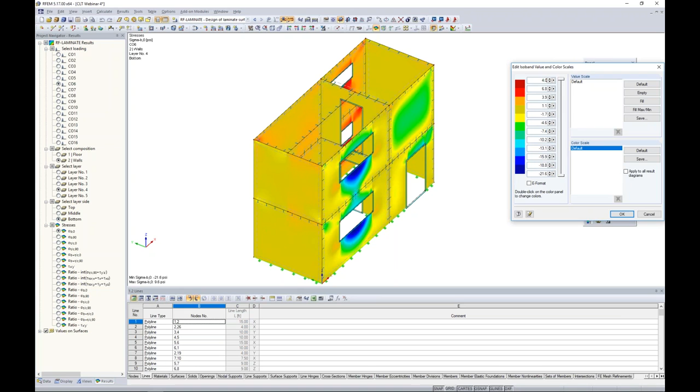This one actually might be a better example. We can change these stresses here. Maybe we're just interested in not quite 9.6, that's a little too high, but maybe we want 4.0. We choose the fill button, we click OK, and now we can see how that panel was adjusted here.

All this information can be printed out directly to the printout report. You can choose mass printing, so that way we can print off all of these load combinations at once, for example, the bending stresses, added to the printout report, and then you can print that off either as a PDF or to your printer. So that's essentially CLT design within the program, including RFEM, the main program, and the add-on module.